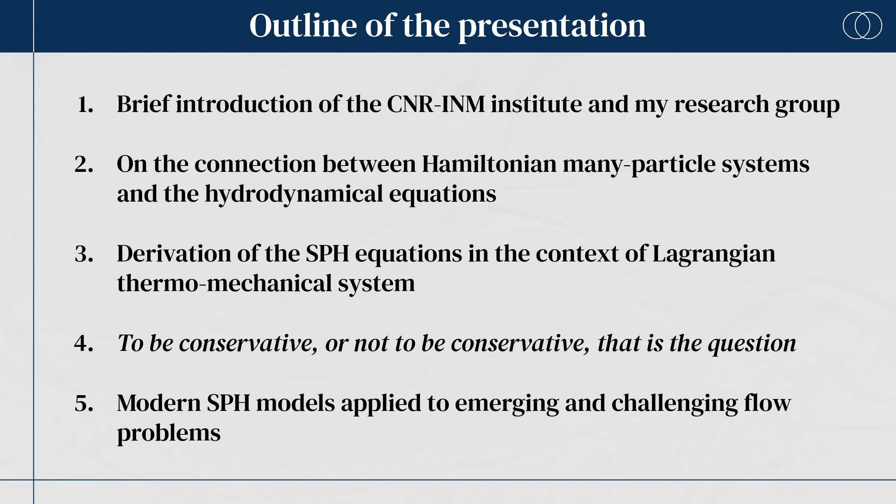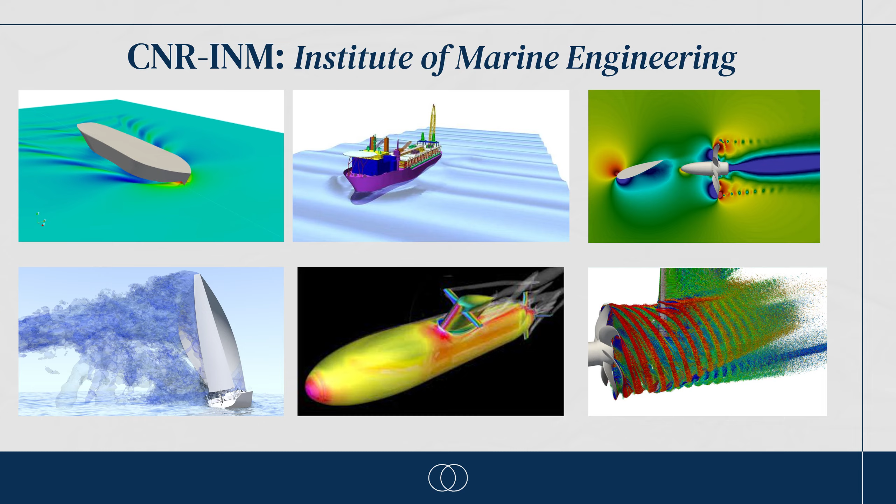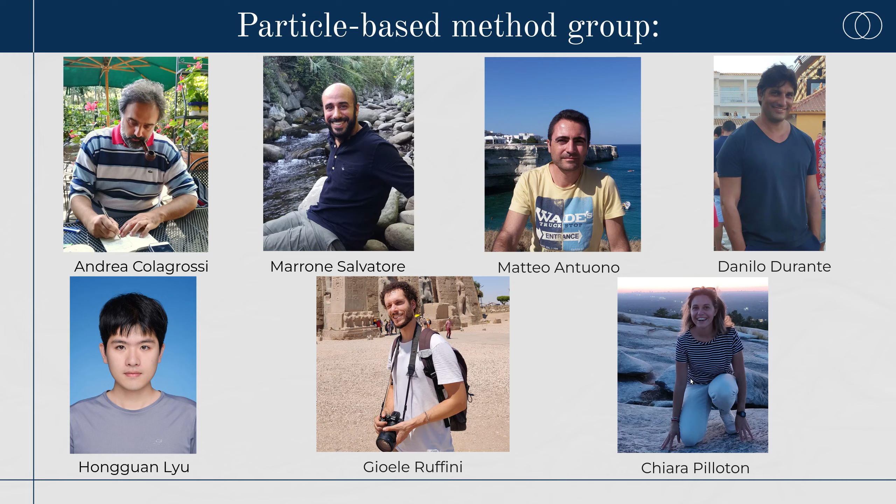Our research activity started about 28 years ago. The main focus was the development of particle methods capable of dealing with flows involving gas-liquid interfaces which undergo large deformation and may even fragment. In addition to code development, we have also devoted a significant part of our work to the theoretical aspects of these methods. As a result, we have been able to collect useful and practical knowledge for the accurate simulation of a wide range of engineering problems.

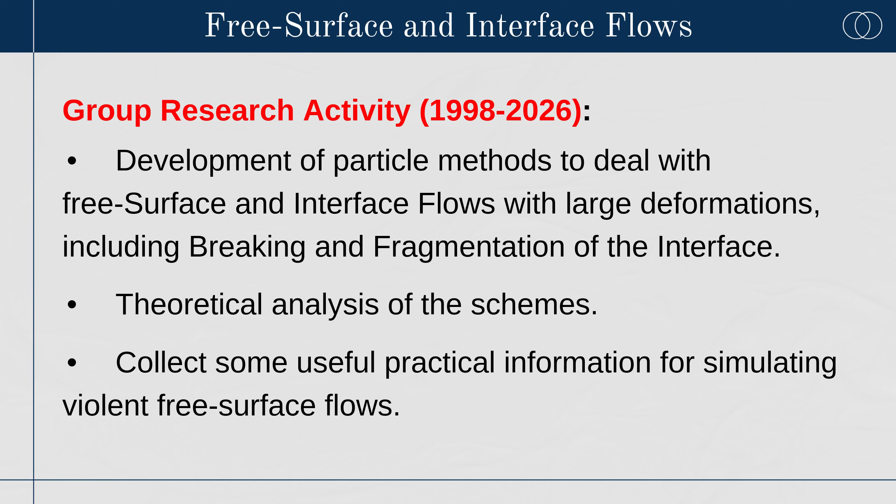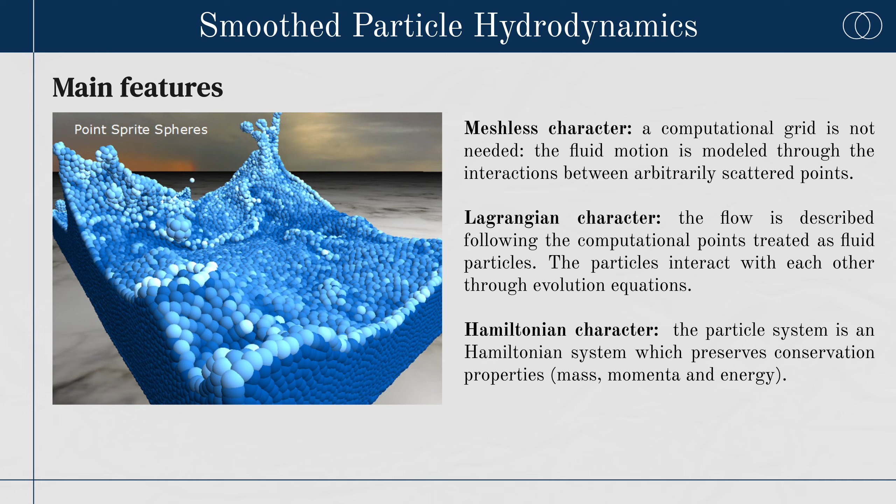The smoothed particle hydrodynamics method has been the main approach studied in our research activity. This method is characterized by three main features. First, the meshless character. No computational grid is required, and the fluid motion is modeled through the interaction between arbitrarily distributed points. Second, the Lagrangian character. The flow is described by following the motion of the computational points, which are treated as particles. Third, the Hamiltonian character. The particle system can be formulated as a Hamiltonian system, which naturally preserves conservation properties such as mass, momentum, and energy. We will discuss this characteristic in more detail during the course of this presentation.

If a numerical solver is able to correctly simulate this benchmark, it can then be applied to engineering problems, such as the simulation of wave patterns generated by fast boats or ships, or problems related to water impacts in the naval, aeronautical, and aerospace industry, or problems of violent free surface flow related to coastal engineering, hydraulic engineering, renewable energy, or the offshore industry.

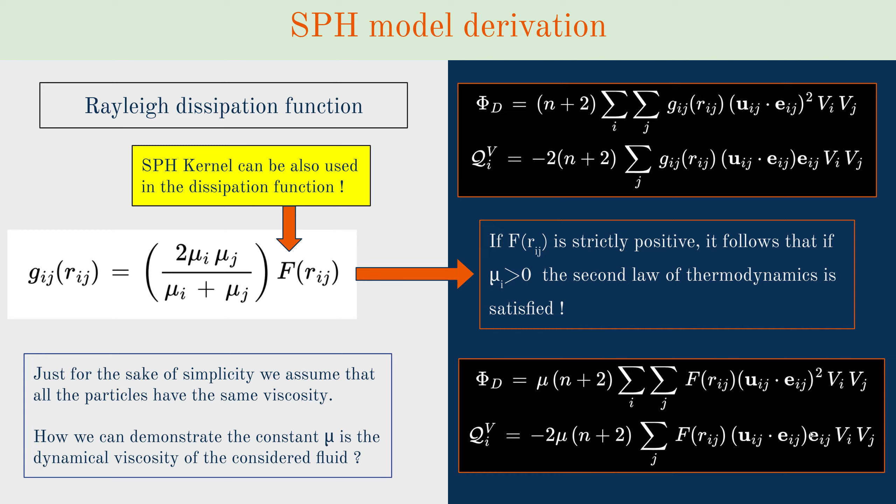In this slide, we finally obtain the SPH equations. On the left-hand side, we have the continuity equation together with the particle volume and the density evaluation. The momentum equation is shown in the center, while on the right-hand side we report the entropy evolution equation. Particles are advected Lagrangially, and an equation of state links entropy, density and pressure.

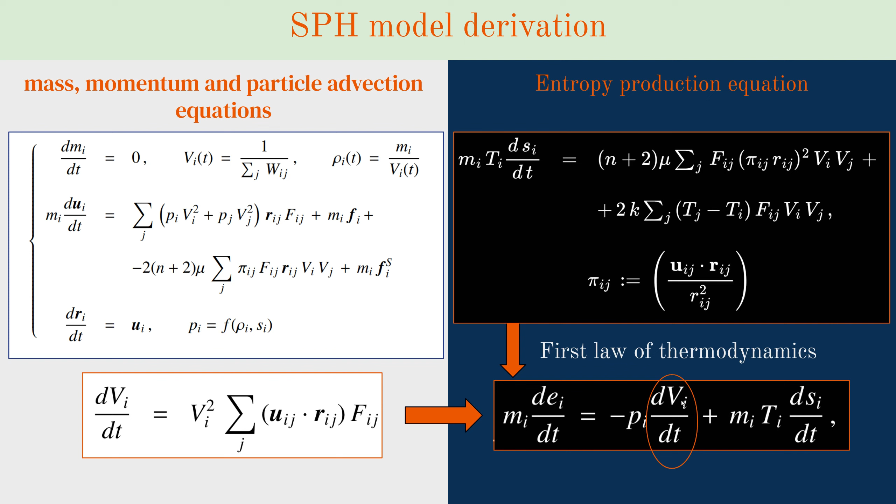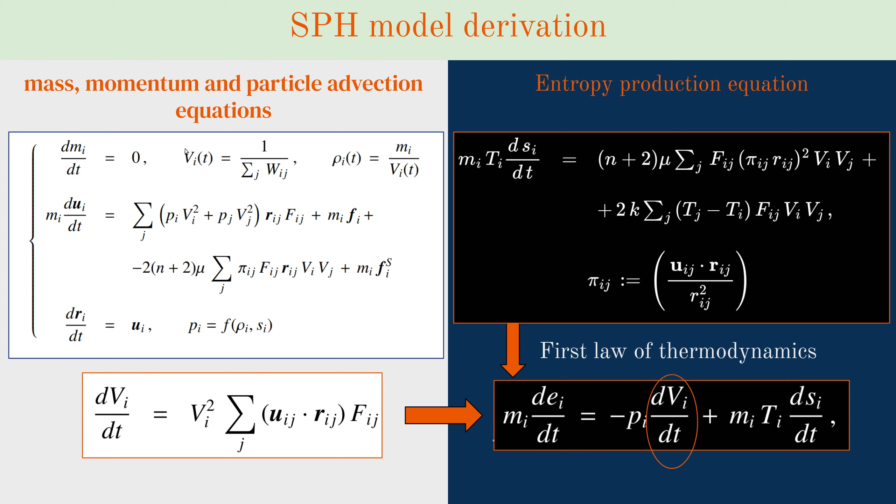In some cases, it is preferable to use the internal energy formulation instead of the entropy one. By again invoking the first law of thermodynamics, we can reformulate this equation accordingly. As you can see, this change of variable requires the knowledge of the time variation of the particle volumes. This can be obtained simply by taking the time derivative of the particle volume expression, where the function f appears once again.

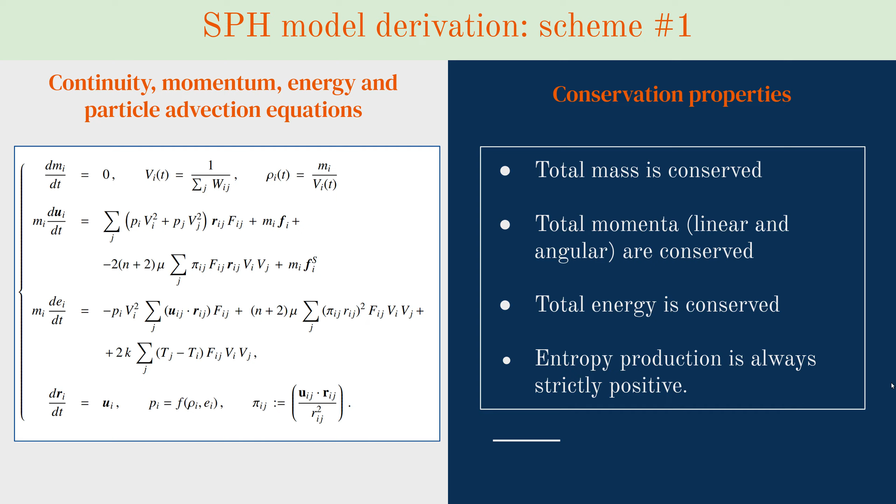This slide presents the first SPH scheme. On the right-hand side, its conservation properties are summarized. Mass, momentum and energy are conserved, while entropy production is always strictly positive.

The first two articles on the SPH method are those by Lucy and by Gingold and Monaghan, both published in December 1977. Each of these papers has received about 10,000 citations and can therefore be considered a milestone for the development of the method. Lucy was the first to introduce the idea of estimating density using a kernel function, while Gingold and Monaghan gave the method its name. These two papers are often cited as the original references for SPH.

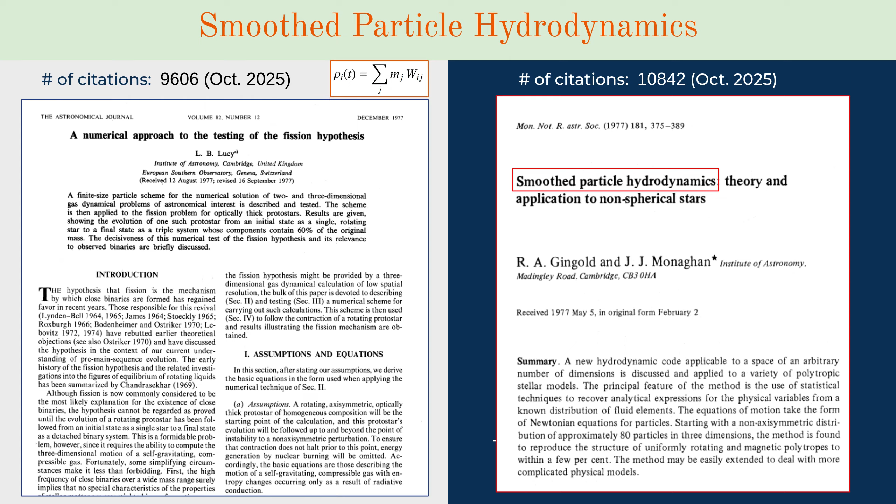However, a careful reading shows that neither of them contains the SPH scheme discussed earlier in this presentation. In particular, the equations proposed in these early works are not conservative with respect to momentum and energy. Indeed, it was in another paper published 5 years later, again by Gingold and Monaghan, that the derivation of SPH equations from a Lagrangian formulation was established. In this work, the conservative SPH scheme was obtained and subsequently adopted by most of the research community. It is quite remarkable that the number of citations of this paper is much smaller compared to the earlier ones.

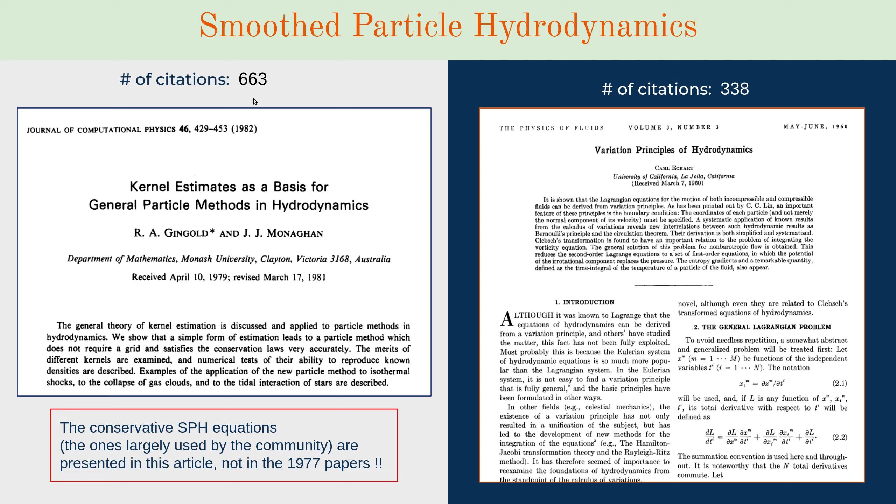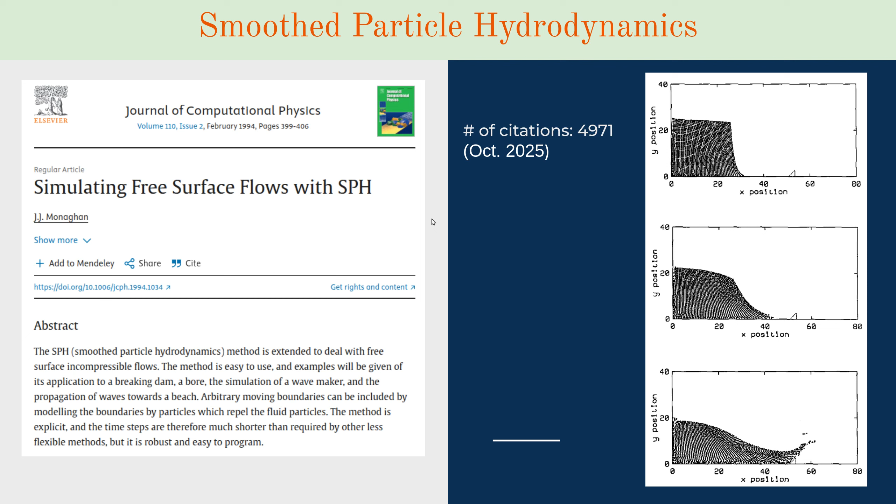Another milestone article for SPH is this one, Simulating Free Surface Flows with SPH, published in 1994. In this work, Professor Monaghan had the key intuition that a method originally developed in an astrophysical context could also be applied to free surface flows. This represents a fundamental step, as it opened the way for a wide range of engineering applications of the SPH method.

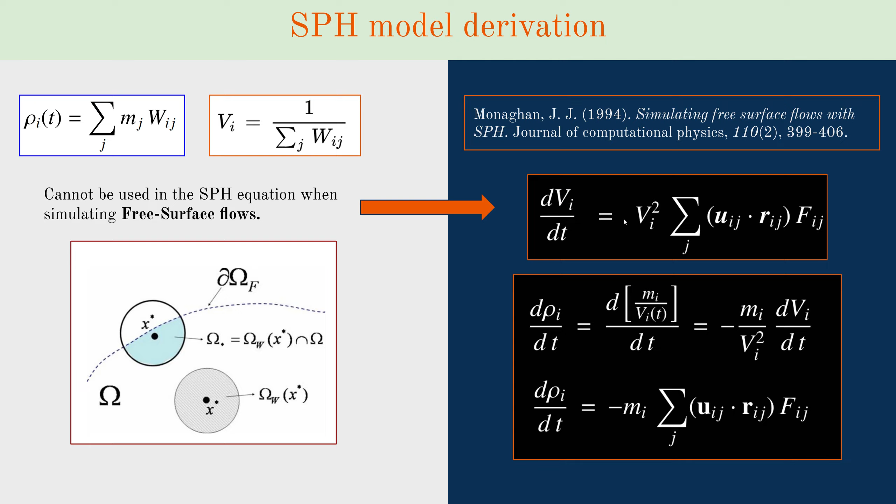Indeed, the original SPH formulation cannot be applied directly to free surface flow. The density and the particle volume expressions presented earlier fail in the vicinity of a free surface due to the truncation of the kernel support. How did Professor Monaghan overcome this problem? The solution consists in deriving the particle volume, or equivalently the particle density, with respect to time, and then integrating numerically the resulting continuity equation. In fact, the time variation of these quantities is not affected by the truncation of the kernel support at the free surface.

Here we have the third SPH scheme, which can be applied both to free surface flows and multiphase flows. As you can see, the continuity equation is written in terms of the time derivative of the density. As shown in the sketch on the right, the fluid domain may include different liquid or gaseous phases, solid boundaries, and a free surface separating the liquids from an empty region E.

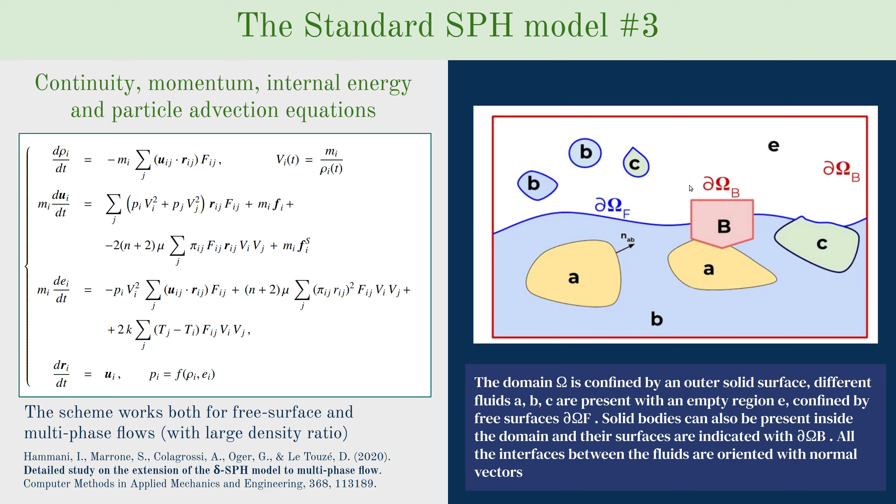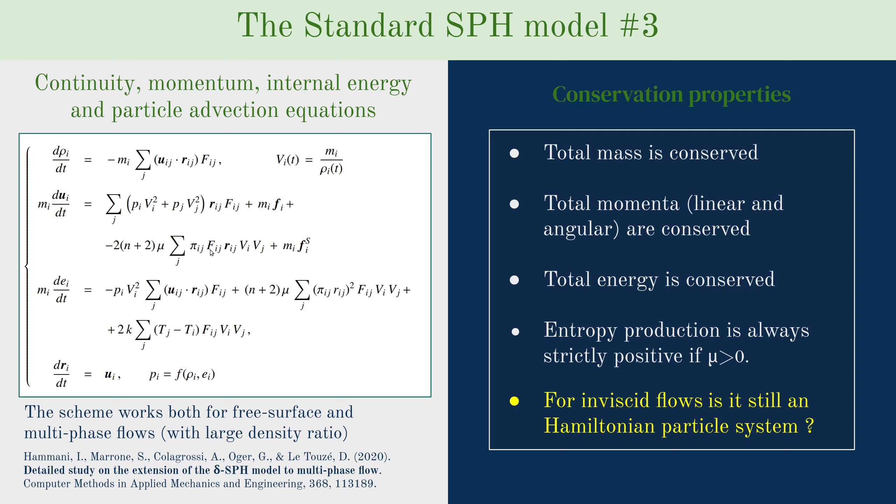This introduces the first compromise. During this presentation, I will show that the history of SPH is essentially based on a series of compromises introduced in order to properly handle flows of increasing complexity.

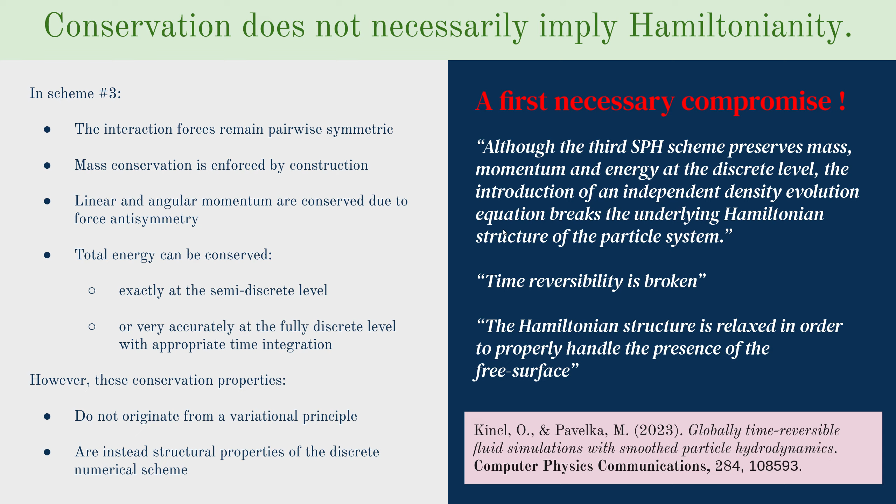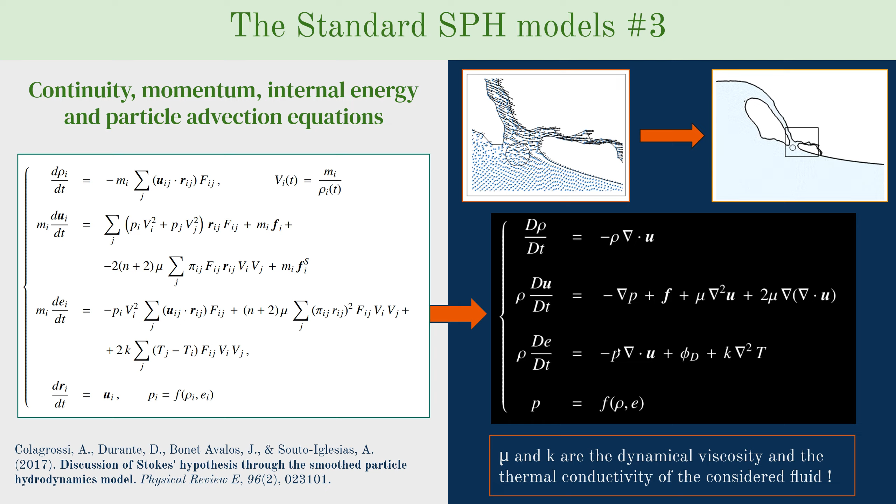Coming back to SPH scheme number 3, if we consider the limit in which the number of particles tends to infinity, it is possible to recognize within the SPH formulation the differential operators of the Navier-Stokes equations. Indeed, it can be demonstrated that the SPH equations are consistent with the Navier-Stokes equations. It is also possible to proceed in the opposite direction, starting from the Navier-Stokes equations, discretizing them on a finite number of particles, and then deriving the SPH equations.

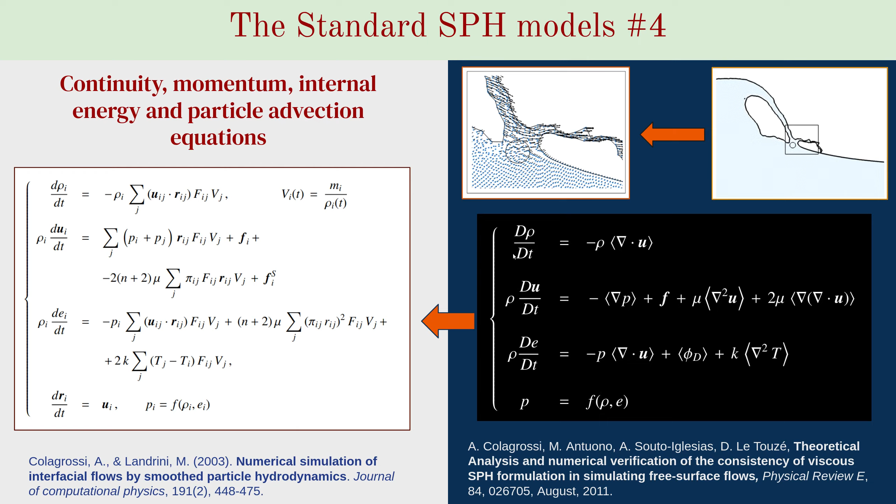There is not enough time in this presentation to explore this second approach in detail. What I would like to emphasize is that this procedure leads to a fourth SPH scheme, which differs from the third one only in the definition of particle volumes. For example, you can see that in the fourth scheme, the particle volume with index J appears where in the third scheme the particle volume with index I is used. So, if the particle volume distribution is characterized by low spatial gradients, the two schemes are practically equivalent.

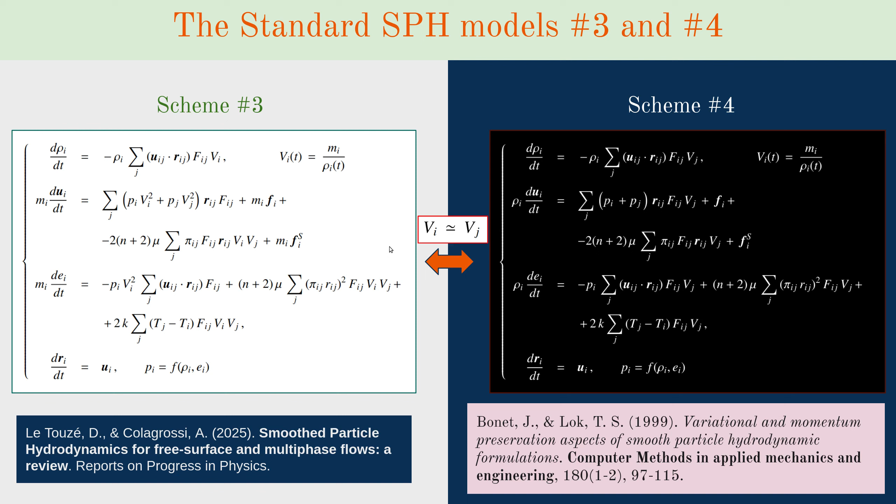In this slide, we summarize the main advantages of SPH schemes number 3 and number 4. The conservative properties are preserved and the second law of thermodynamics is respected. Since particles are transported in a Lagrangian manner, the free surface kinematic boundary condition is automatically enforced. Concerning the free surface dynamic boundary condition, this is also implicitly satisfied, as demonstrated in the reference reported in this slide. These two last points are particularly important since they imply that there is no need to explicitly detect free surface particles or to impose the boundary condition numerically. I would like to stress that the success of the SPH method over the last decades is largely due to these properties. On the right, in red, the first compromise we have to accept is highlighted.

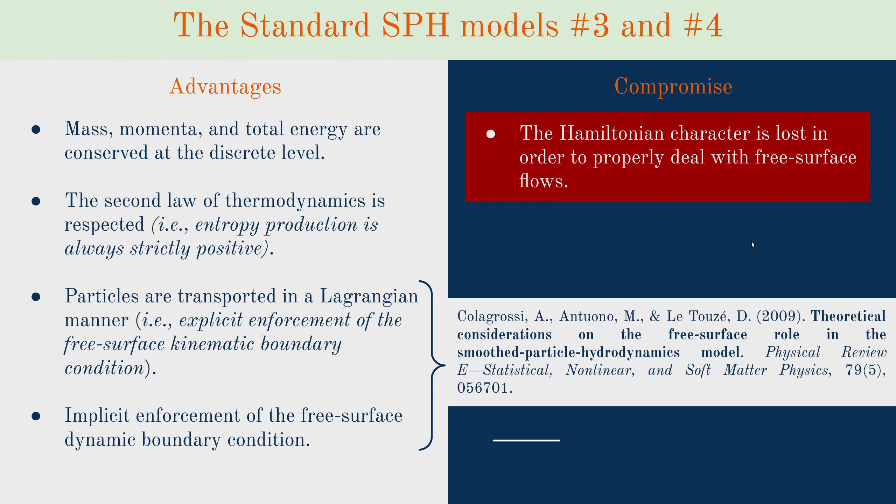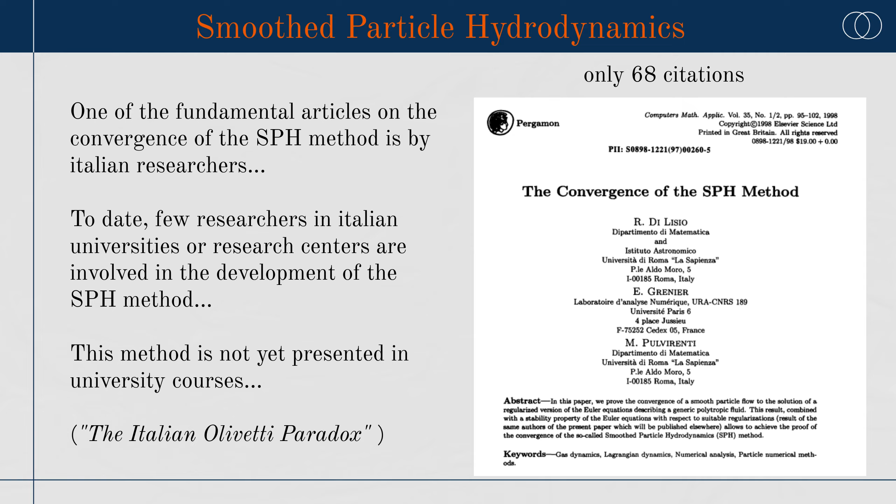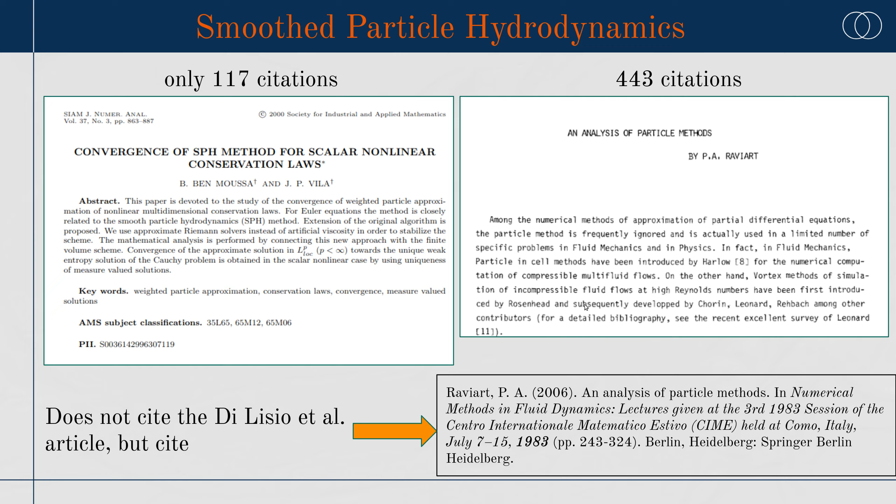Before closing the first part of this presentation, I just want to recall three milestone articles about the mathematical proof of SPH convergence, which is a quite complex topic. The first article on SPH convergence was done by some Italian colleagues in 1998. This is a typical Italian story where we were the first in doing something new, but we were not able to use this advantage with respect to other countries. The other two relevant articles are from French colleagues, again linked with the topic of the convergence of SPH and also in the more general context of particle methods.

This concludes the first part of this presentation. In the second video, we will move from the theoretical foundation to the numerical aspects of SPH, focusing on instability, conservation issues, and on the modern formulations that make the method suitable for challenging engineering applications.